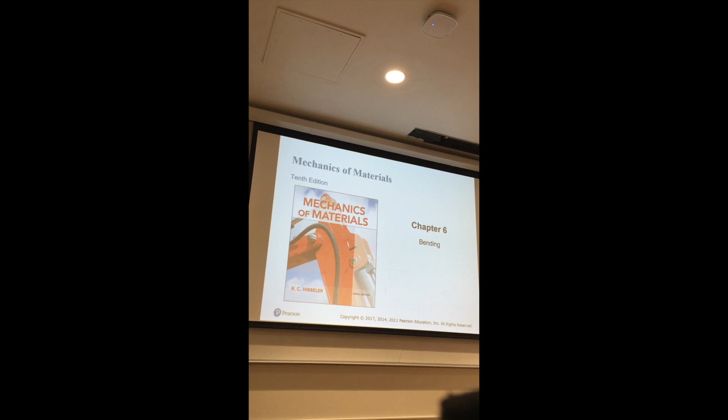So, hopefully you've studied, yes, because if you didn't study, it's gonna be tough, okay? But if you did study, it's not a difficult exam, okay? So you should be able to go through it pretty straightforward, the things we did in class. You have the review questions, right? And the solutions as of yesterday or Saturday, whatever that was. So try those, and if something doesn't work, let me know.

You got the announcement, right? So tomorrow we have an office hour out of the norm because it's the day before the exam. So I'll be on Zoom, you have the link, hop on if you have questions, I'll try to answer them. Again, if you have questions today or tomorrow, let me know, not 9 p.m. on Tuesday, okay? I probably won't be able to see it, okay?

So that's one thing. A couple of you asked questions about how the exam is, obviously in person, you should know that by now. Same place, okay, same time, don't be late. You're not supposed to bring any notes, formula, or cheat sheet or anything, I'll give you all you need. All you need apart from that is a calculator, okay, calculator you should all have. Your iPhones have calculators, engineering calculator that is, okay, you need to do some angles, square roots and so on, okay.

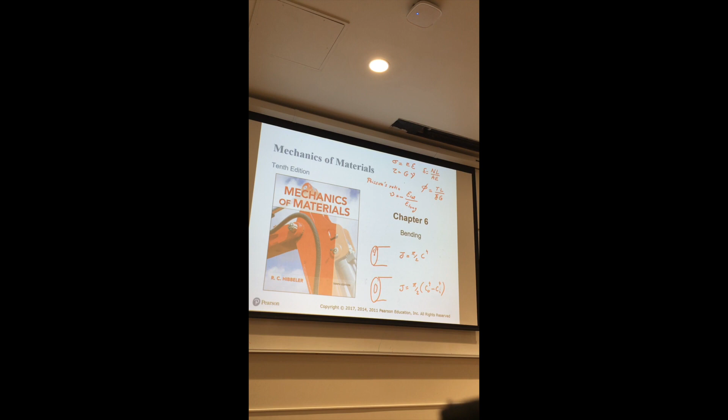What about the compatibility equations? What's the compatibility equation? It's an equation from constraints that we use to apply with the equations we find in the notes. So what is that equation?

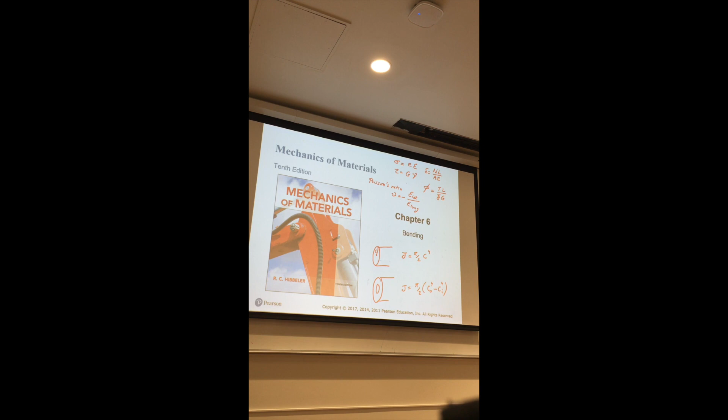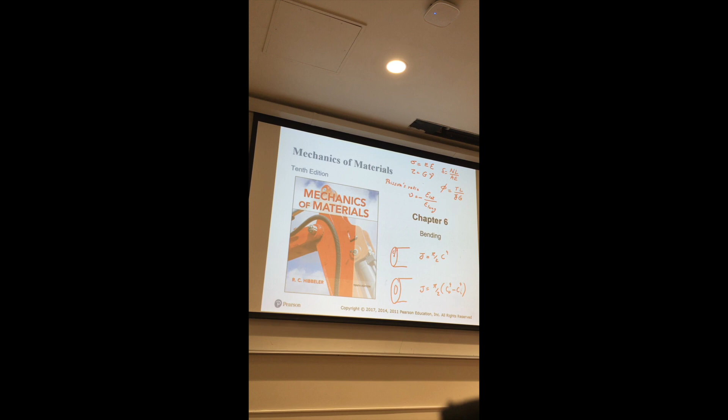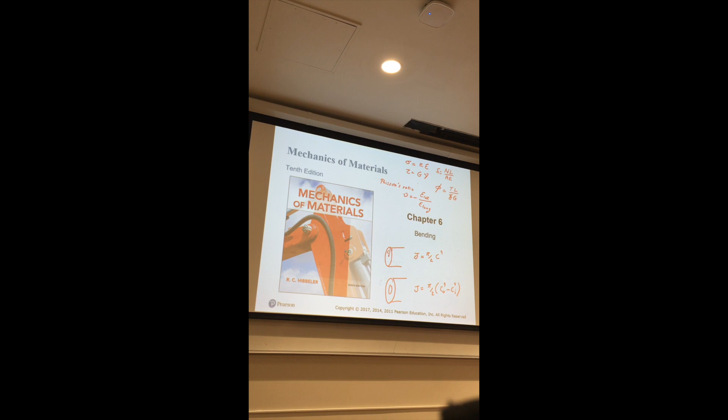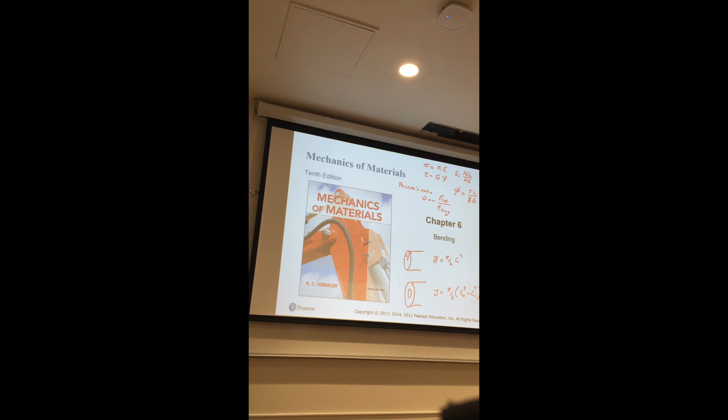So that's the case where you have more unknowns than you can determine, an indeterminate problem. For example, in the case of a column or beam fixed on both ends, what's the equation there? The sum of the deltas equals zero. More simply said, this distance is fixed, so whatever change in length you have is going to be inside. This distance is fixed, right? I don't think that's something I'd need to give you, hopefully you know that.

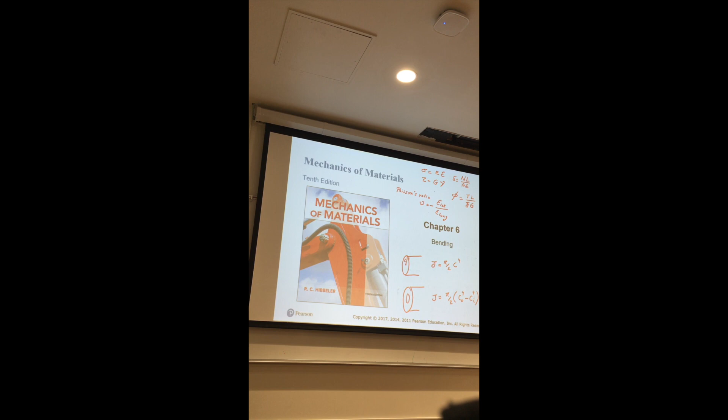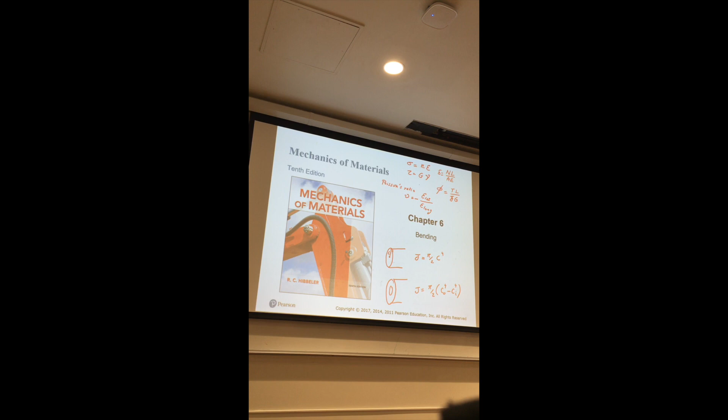Anything else? How about when you have a compressive force and there's two beams that shrink a little bit, and there's a beam in the middle that now hits a little bit of this piece? So like, let's say you have two steel beams and a smaller one in the center, and it pushes a plane, and it squishes the beams that are equal on the left and right, and then the middle one after a little bit. I'm not totally sure I understood which problem that is, but it's the same thing: if the two ends are fixed, you know the length.

If they're not, then you know how much tolerance there is, right? That's another example you should know how to solve. You remember applying a tensile load on a member, and there was a little bit, like 0.2 millimeters of extra room. So you need to fill that and calculate the amount of extra force or resistance. Same deal - you know the geometric constraints, and you apply them.

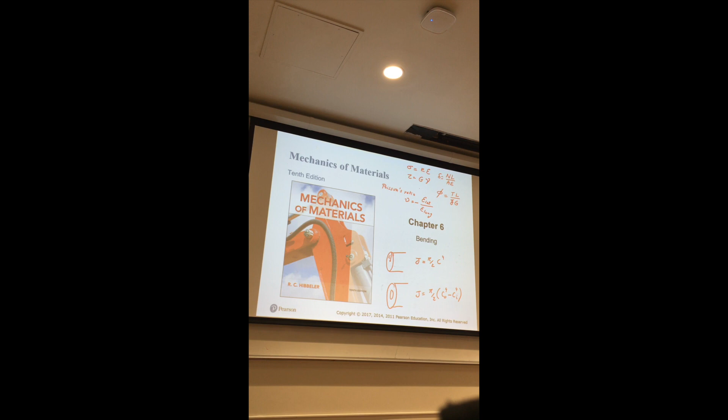Yes? The what? What's a blue book? We don't need it. What is it? I think you have to buy it. It's just like a test book. No, it's like a test packet. Some professors require it. No, I'll give you the physical exam books and you write in those. Sound good? Okay. I don't know, we'll see.

So one more quick thing - you got this, right? Everybody solved this? Good, and you got the final answers I guess. I think this is from the book, but one thing I wanted to mention: we drew up this torque versus X diagram, or in the case of axial load, we drew the force, internal force versus X diagram. Do that for the exam, okay?

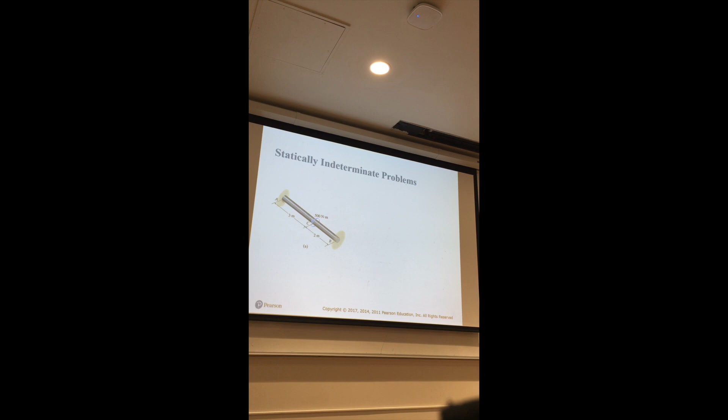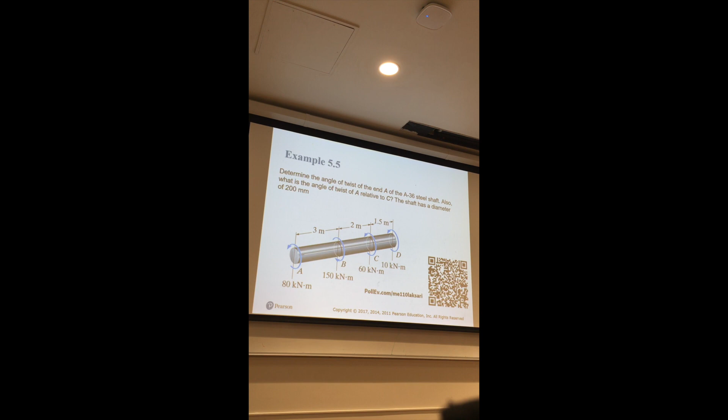So again, you start from the right end of this, X equals 6.5 at point A, and then make your way to the left. You draw that diagram because it helps you - from here you can see that the torque is constant at minus 10 kilonewton meters from x equals 6.5 all the way to x equals 5, right? That's your section, basically. This goes hand in hand with your other section, and should help you a lot. You can do this for the axial load as well. Every time you have a point force or an external load added to the problem, you should expect a jump. So for example, if this is point A, remember that - yeah, it doesn't matter, I think this one went from one end to the other.

So we have 10 kilonewtons at D, right? I think I said A by mistake, but this is D. So at D it has 10 kilonewtons. Here there is an external torque of 10 kilonewtons.

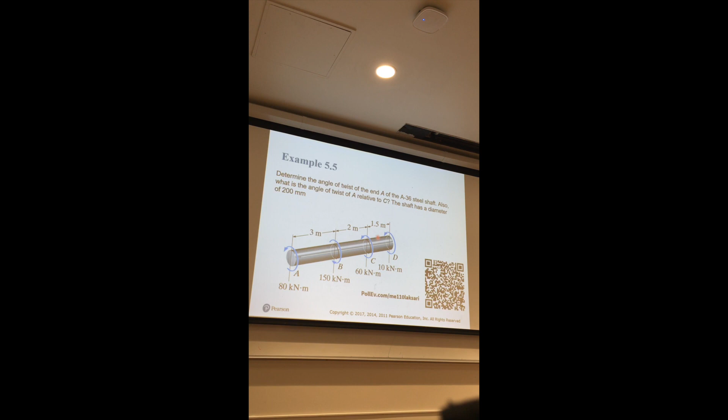Is this negative or positive? There were a few questions about that. This is important, right? It's not important to assume one direction is negative and the other positive, but it is important to stay consistent. The convention we use in class: is that 10 kilonewtons positive or negative? Negative. Why? Because it points towards the... So if your forefingers are the direction of rotation, or the torque, your thumb is the direction of that vector. If it's pointing inwards, that is taken as a negative sign.

So D has a negative 10. It starts with negative 10 up there, and then it's constant all the way to point C, where we have an additional 60 kilonewtons, still negative, because that's also in that direction. So you had a negative 10, you add another negative 60, it becomes negative 70. So negative 10, negative 70, and it goes all the way to point B.

At which point we are applying a positive, this is the other direction, a positive 150 kilonewtons. Why is the 150 positive if the rule still applies? When you curl it, you're still pointing inwards into the rod. That's not inwards, right? But the thumb is going into the rod though. It's going out. How's it going out?

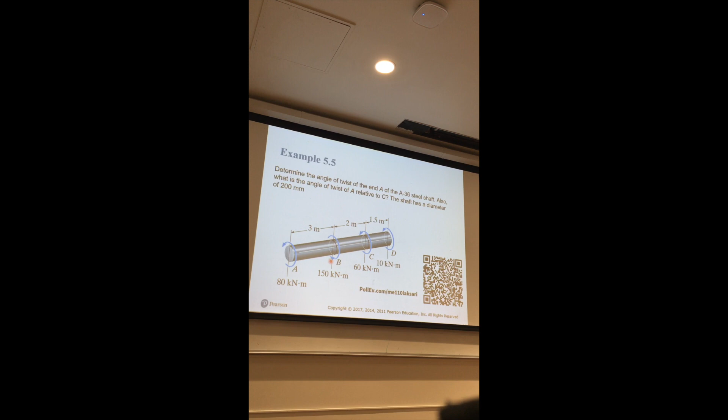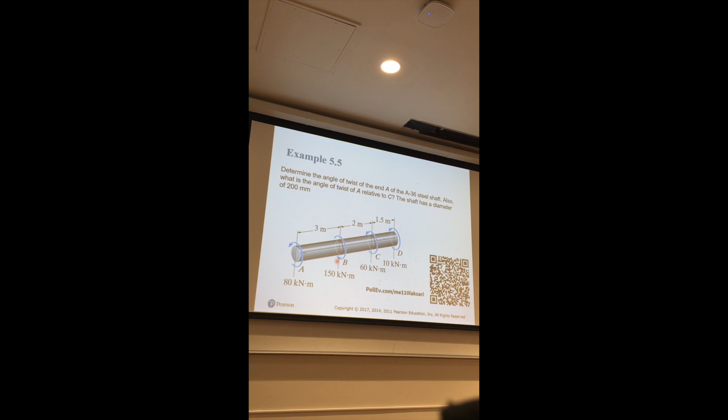But the reason behind it is this: when you make a cut and you're looking at the AB section, that is the direction, so in the AB section it's pointing out. And that's where the jump goes to positive 150, which, we had a negative 70, we go up 150, so that's positive 80. So this diagram will guide you through everything.

So you have this, you know the length, you know the shear modulus, in this problem it's a constant value, so that's easy, but if you need, you can use that. This tells you the lengths, and with each section what area you need to calculate and so on. The rest of it is just plugging everything into that formula. This diagram helps you a lot. The same for axial load, where your y-axis will be N, in newtons, and your x-axis remains the same, in meters.

So what's the torsion? Twisting is that way, right? What's bending? It's that way. You see how they're different? This was my best attempt at 3D visualization here. One more time. So twisting is, you kind of, twisting. You call it twisting even, right? I think that makes sense.

This is the torsion, right? So you see the letters on here are moving with respect to each other, if you think of all those longitudinal lines. But then bending is that way. So it applies the force perpendicular to what we had as torsion.

You had a question? Yes, you symbolized the direction as a dot and an arrow. Well, no, I don't think that's official. Wait, but so I think the way you showed with a dot and a circle that's coming out, and a circle with the dot going in. Yeah, but I just wanted to... I think that marker example was best.

So what's a good example of bending moment? Wait, tell me again, what was the good example for torsion?

Mechanical engineers? What's a good example for torsion? A shaft is a good example, right? Power transmission with a shaft, okay?

And then for bending? A bridge, yes, maybe more civil engineers, but still the same. So bending of a bridge, the loading of a bridge, how is that bending again? Because there's a car coming on it, there's weight on it. The weight of the bridge itself, plus the weight of the cars, that's causing the force kind of in the middle. Or if you think about it, if I have a vertical load on a beam, is that bending again,

or torsion, do you think? So if you look at it, you have a beam, you're applying load here, what's your reaction at the ends, the moments? Those reactions are bending moments, correct? Of course, it's not that simple, and lots of things happen on a bridge, but you can think of it that way.

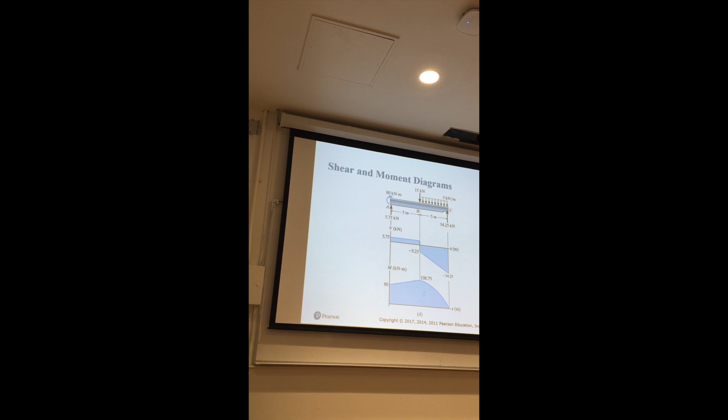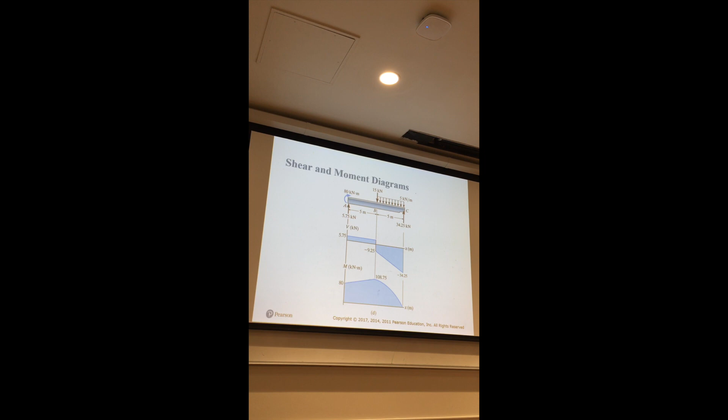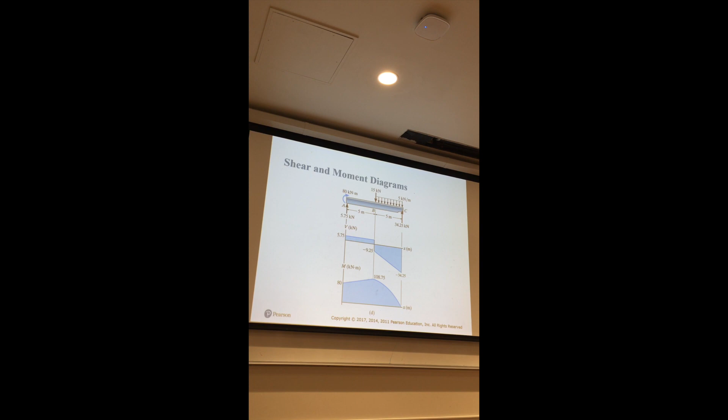What's a good example of that? Like, what is the difference between that 15 kilonewton point force at B and then the distributed load between B and C at 5 kilonewton per meter? I know you all know this, but let's do it quick. What's the difference there? Can you think of a good, real-world example? What is that 15 kilonewtons?

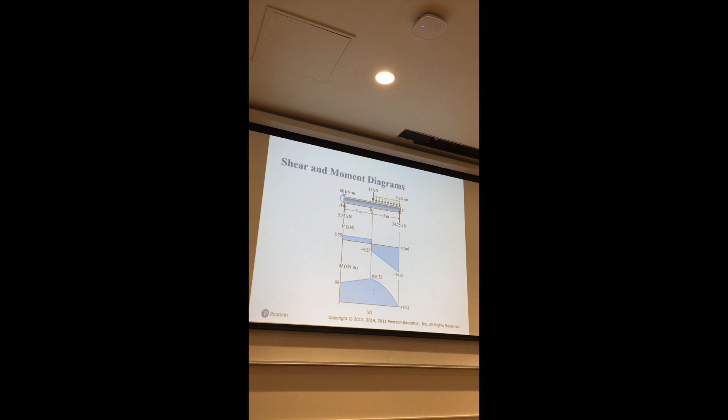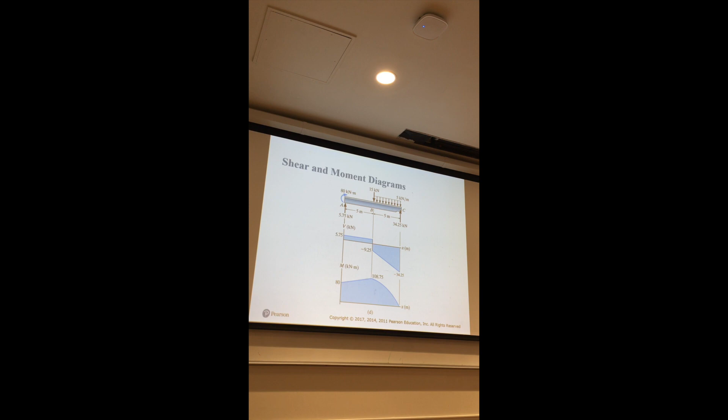Anyone? This should be simple, right? You're just applying some load at that point B. That could be a column right there, or you can have extra weight at that single point. Is it the weight of the beam? Well, is it the weight of the beam? Anyone? It's not the weight of the beam? Why not? The weight of the beam would be distributed across the whole beam, and that's only 15 kilonewtons on one point.

Right. The weight is usually distributed, right, if it is a small scale in terms of the size. If it's small scale with respect to the beam itself, you can assume that as a point, right? So let's say you have a column that's this big in the middle of that beam, but the beam is like 20 meters long. So you neglect that size and you say, okay, there's only one point that's applied. But if you're thinking about the weight of the beam itself, it is distributed, right? Or if you have extra load between B and C, people are standing there, for example. That's a distributed load. But of course, we can kind of go between these, right?

So how do we find the reactions, remember, for free body diagram, for distributed load?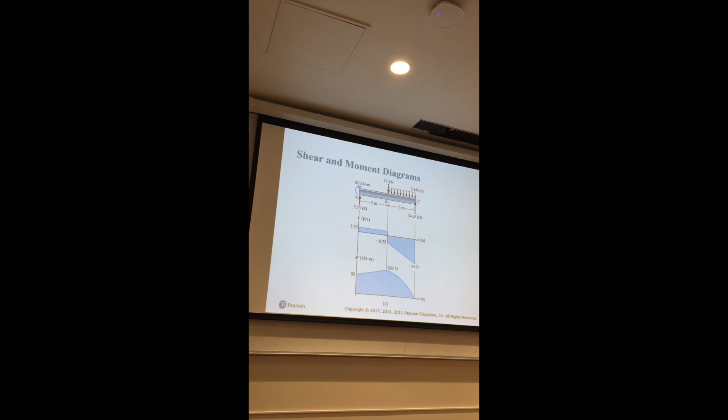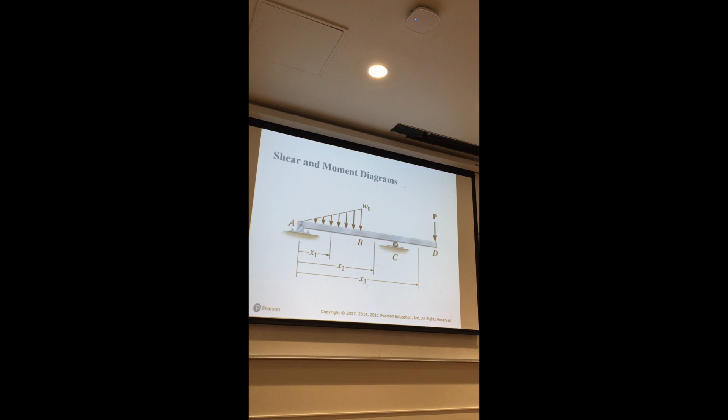I mean, here you have all the information, but let me give you an example. Let's say you have supports at A and C, you're applying load P at the end point D, and then you have some distributed load that is not constant. So this looks like a complicated problem. How do we go about solving something like this?

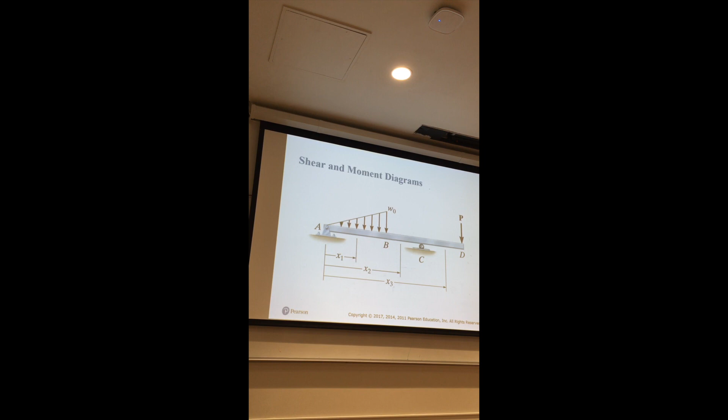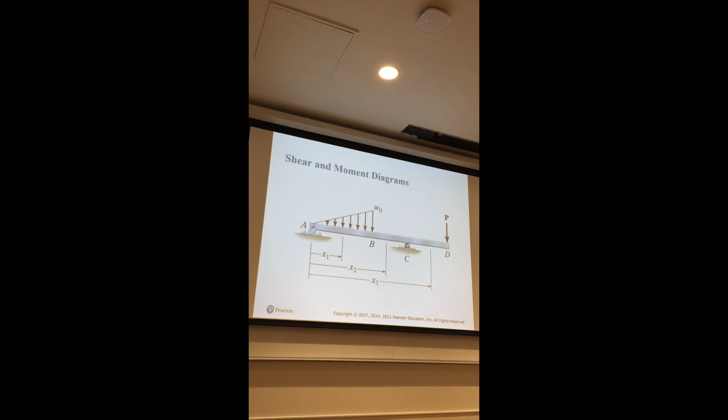First thing, always, free body diagram. So for the free body diagram, you should start by drawing a beam, then draw the applied force P, and the reaction forces at the joints—we have two reactions at A and C, including a normal reaction at C.

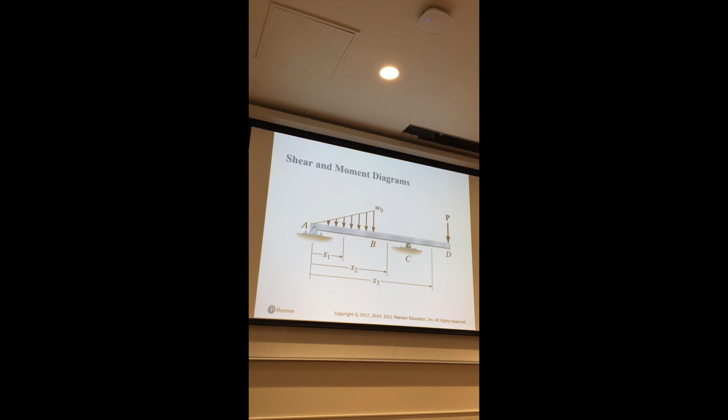Usually we have the reaction forces and moments, right? We have the moments also, and then whatever you want to do in statics, there are three equations: sum of forces in X equals 0, sum of forces in Y equals 0, sum of moments around a certain point equals 0.

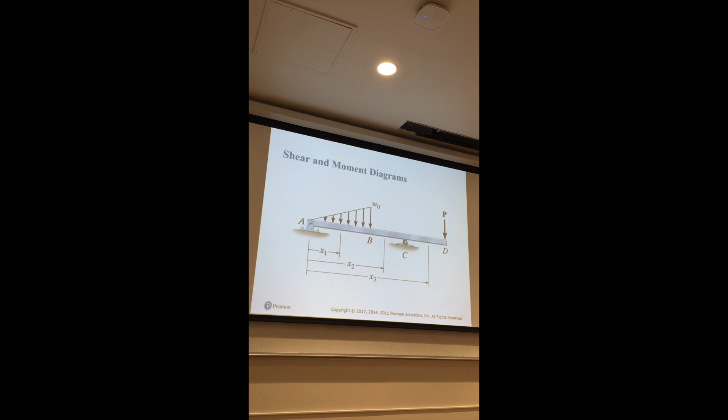So you do that, and then you get all these forces. You have the reaction force at A, let's say in this example, you have the reaction force at C, and you know the moment, 80 kilonewton at A. So this is what you're left with, and then you start from point A.

So what's the first section? Let's say you want to do your shear force, V. Can someone help me draw this diagram or understand it? I've already given you what it should look like. So start from point A.

Let's say we know this arrow at point A, which is 5.75 kilonewton. We start from there, and from A to B that's pretty much all there is in terms of shear forces. So we end up with a constant value there at 5.75. Then what happens at point B?

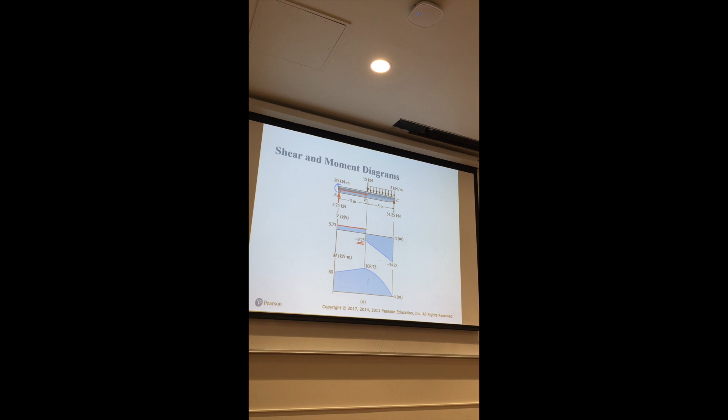An applied concentrated load of 15 kilonewtons is applied at B, so you basically go down by 15. So that should give you what? Negative... 5.75 minus 15, it goes negative. Does this number make sense? Yes, because 5.75 plus 9.25 is 15, so 5.75 minus 15 should be negative 9.25.

But then you have something else there too—you have to consider the distributed load as well. So then you get to 9.25.

We'll do an example—you don't need to solve this all right now, but I want to go through the process of what we do. So let's say we get to negative 9.25, and then what happens here? Why is that at a slope as opposed to the constant value before?

Because the load applied increases with every meter along the bar. Depending on how far you are from point B, that load is increasing—that's the definition of a distributed load. A uniform distribution of load: as you go from point B towards point C, you see more and more of this load, and that's why you have this slope. That's essentially the difference between a distributed load and a point force—a point load you see a jump, and then it stays constant, whatever that is. But with the distributed load, you have a slope.

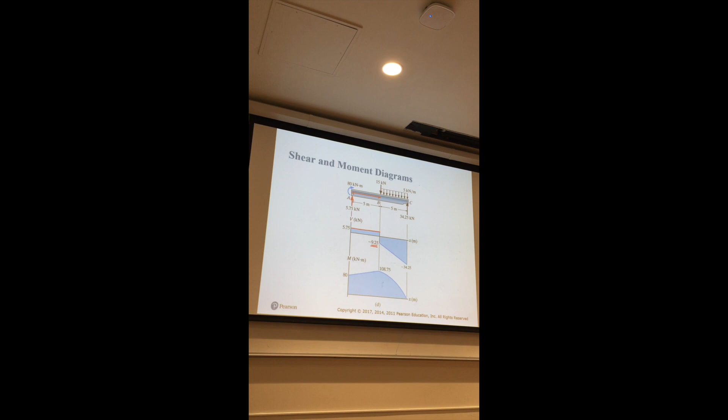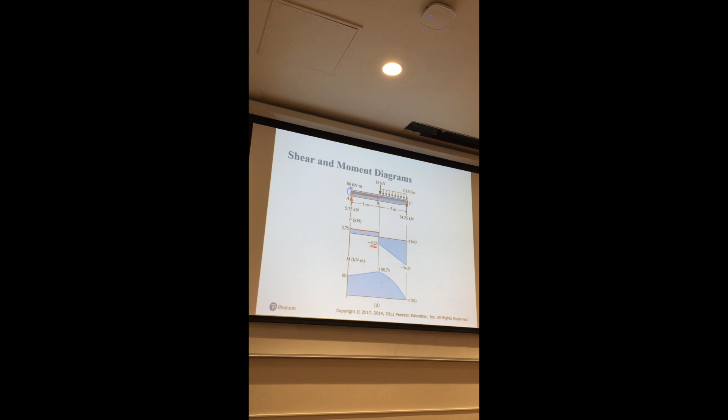34.25 has to be exactly like negative, right? So when you have that external reaction force, it goes down to 0. That's the deal there. So if that number doesn't look like that, you've done something wrong.

Okay, and then we'll derive the... yes? I have a question. So in the center, I'm a little confused with what you did. Why did you add 5.75 to 15 to get negative 9.25? But why isn't it like, because on the ends the points are just equal to the forces at the end in the graph. So why in the center is it not like that?

In the end, say that one more time. In the end, they're the same as... so in the graph, the points, the y-axis, V kilonewtons, is equal to the force at each end of the beam, whereas in the center it's like you added. That's a good question. Like, why does it do that? So who can tell me, who can help me answer this question?

So the question is, well, we start with 5.75, which is the same as reaction at A, and then we end at 34.25, which is the same as reaction at point C. So that's the forces, and you see the same exact thing on that diagram of V. What happens in the middle?

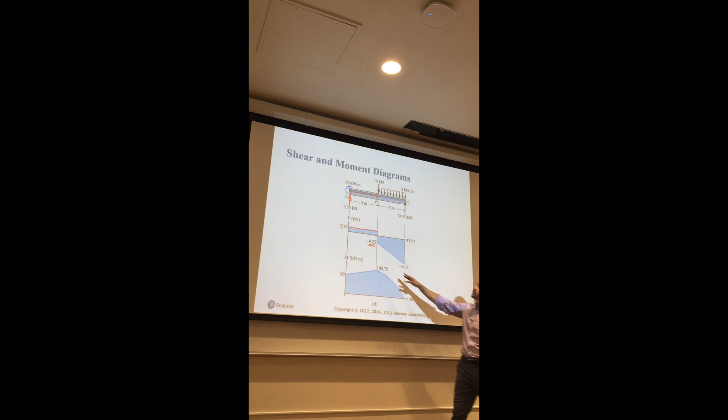So why don't we have 15, right, or something. Is that the question? Yeah, pretty much. So why? Who can help me? Like if you imagine you put your finger across the beam, you start with a positive 5.75 and move along it. It's always going to be 5.75 until you get to the point of 15, in which it's now 15 minus 5.75 instead of opposite direction, which is how you get negative 9.25.

And then you follow the forces again, but you see that the 15 kilonewtons goes down to 5 kilonewtons per meter, so that's at the end eventually going to get to negative 34.25. So because it's this diagram. Does that make sense? Well, okay, so does this look like the method of sections that we've been doing?

That was a trick question. The answer is yes, it is the method of sections. If you think about it, you start from that end, and then whenever you have an additional external force, there's going to be a change in your V diagram.

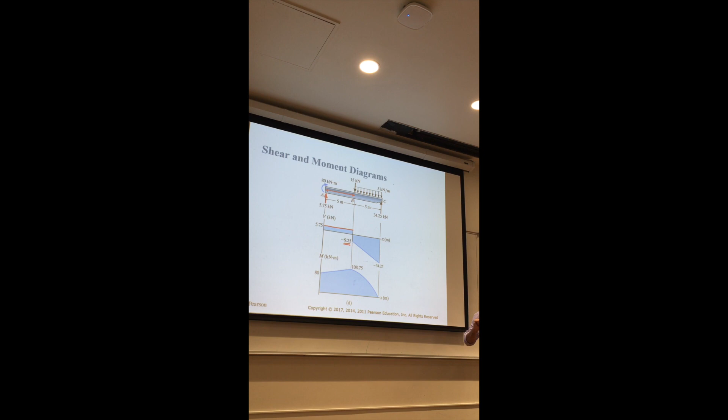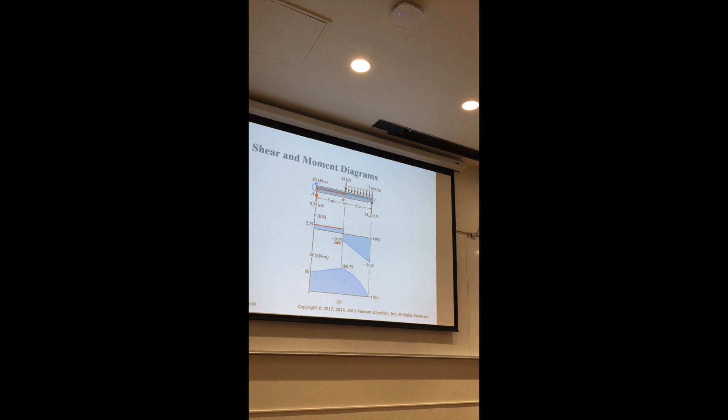Essentially, this is your internal shear force diagram, right? And that's what you do, you start from that end. The reason why that number is not equal to 15 is you already have some internal force in the beam, and then you apply that 15 on top of it, right? So that total negative 34.25 is essentially because the force in C now has to totally cancel that out.

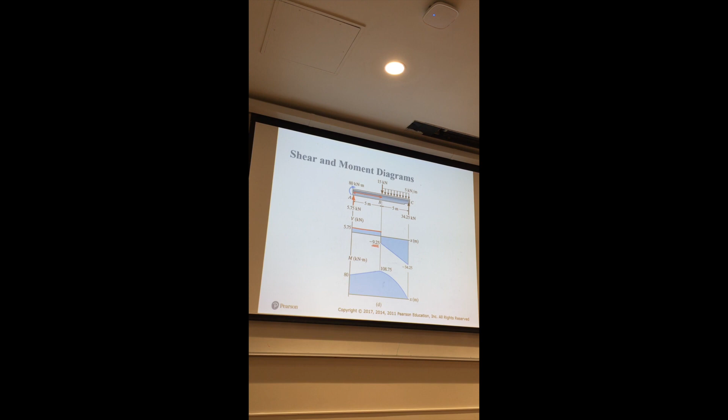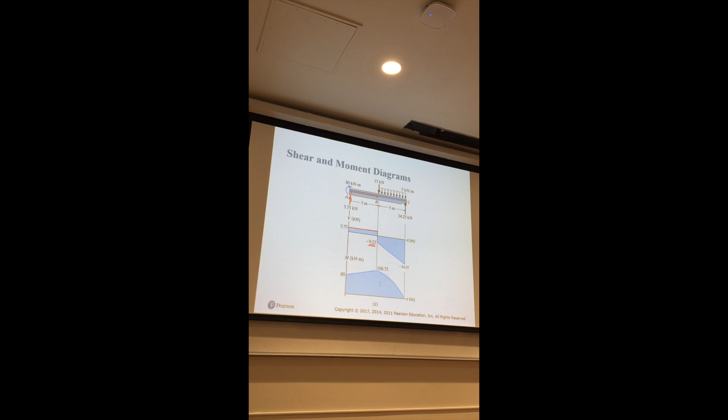So you have to consider equilibrium always, right? At every point, you need to have equilibrium. So that's why when you make a cut, you have 5.75 internal shear force, and then you make a cut there, that has to be equal and opposite in direction. That's the reason, basically. Good one. So hopefully, we're repeating this over and over. You're all familiar with the concept of equilibrium, but you need to kind of see that everywhere, right? In these static problems, you need to have that always applied.

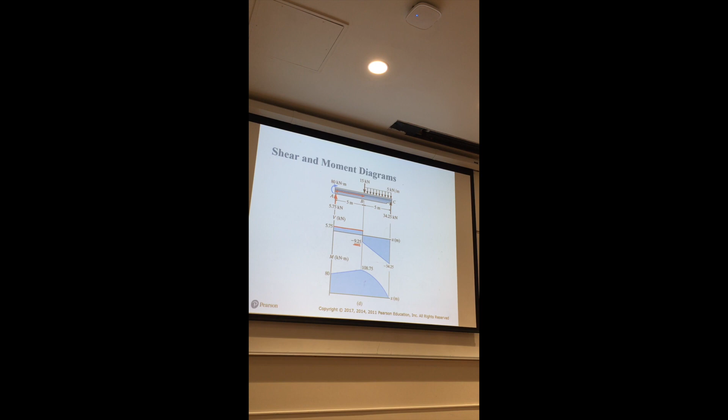Okay, again, a couple of notes here. Does it matter if I start from left or right? It doesn't matter, it's arbitrary, right? So you can start from point C and say, okay, at point C I need to start from 34.25, and then go to the left. Usually the convention is you start from the left and move this way, okay? So your axis, basically your x-axis, is arbitrary, but you know that already.

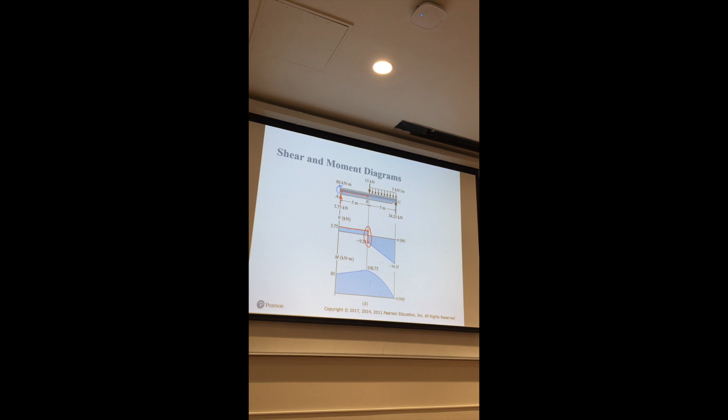And then the other thing is you see these, what we call discontinuities, right? So the number is 5.75, and then all of a sudden it jumps to negative 9.25. You've seen this before, right? In the case of moments, or torsion moments, or axial loads, right? You're already familiar with this, but this happens when?

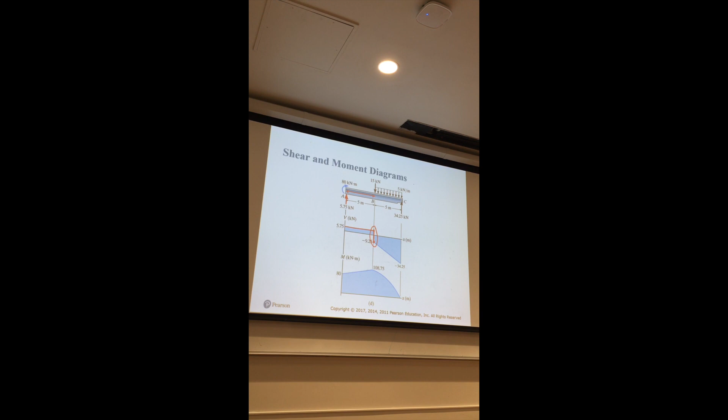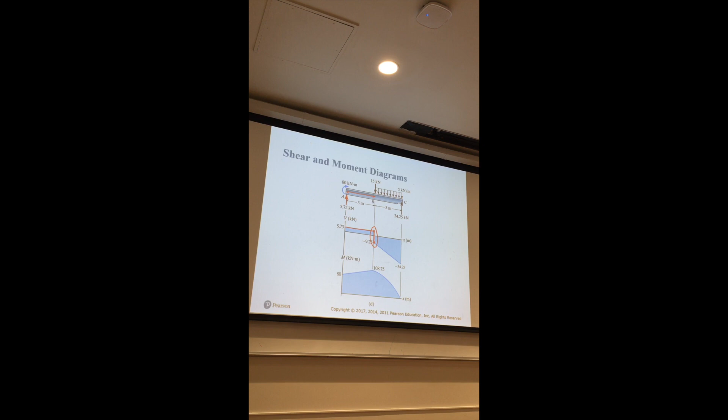Every time that we have an external force or external moment or something like that, you will see a jump there in the shear force, especially. Okay, so let me make that more clear. So whenever you have an external shear force, you see a jump in the shear force diagram. Whenever you have an external moment, you will see a jump in the moment diagram, right?

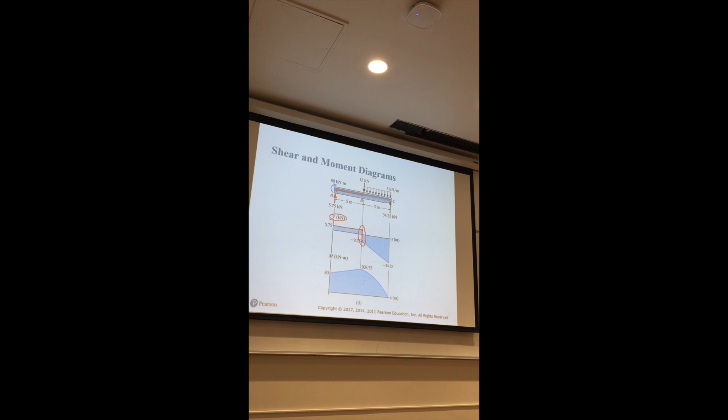So this is a continuous graph. There's no discontinuities here, because why? Because we don't have any moments applied externally in the middle of the beam. But if say we had something here, you would see a jump at this point to some value, the same way you see now in the shear force diagram. Okay.

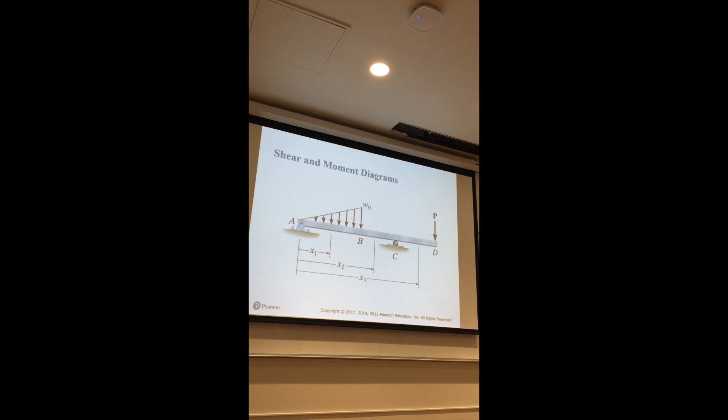So the reason why I say this is similar to method of sections is that these shear force V and moment, internal moment M, you deal with them wherever they're between these two discontinuities, right?

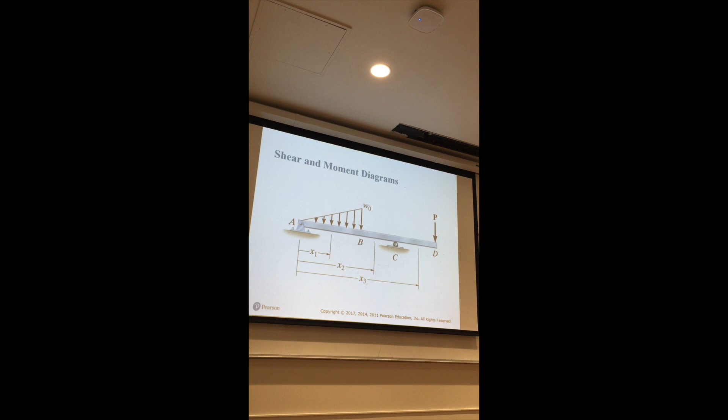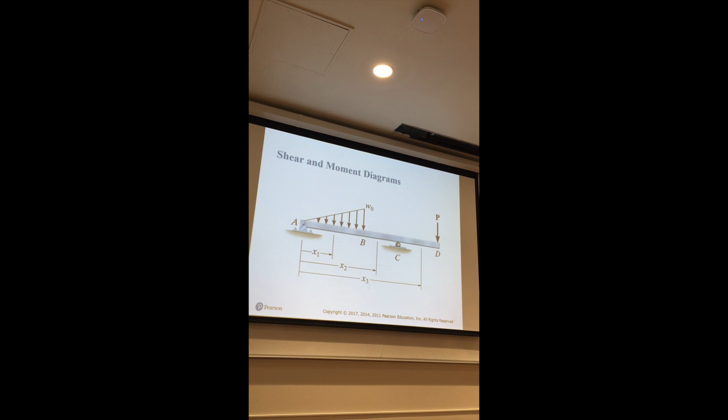So in this example, we start from A and go all the way to B. So we have AB as one section, and then BC as another section. There's no force there, so it stays constant, so you take that as one. Then you have the external force C applied here, so this is another section you need to look at. Definitely you will have a jump in shear force at point C.

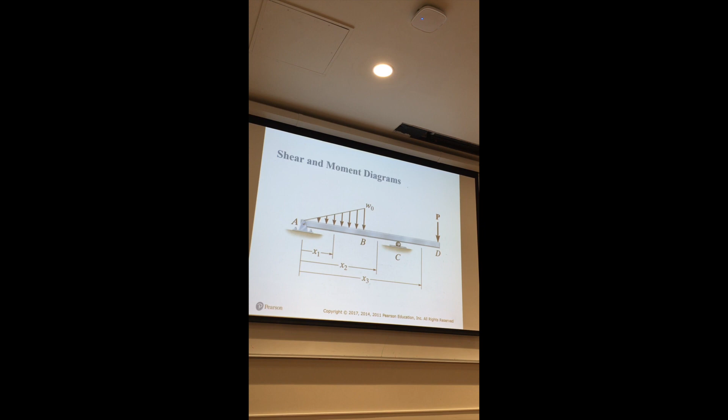And then you go all the way to D. So like before, you look at AB, BC, and then CD, and calculate the shear forces inside for each of those regions, okay?

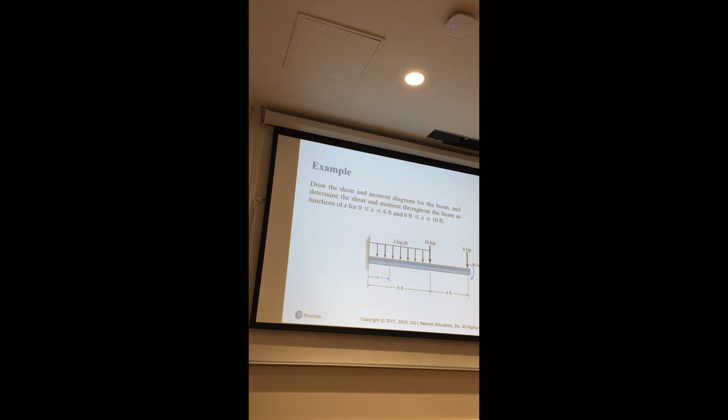So, let's do a simple one. Draw the shear and moment diagrams for the beam and determine the shear and moment throughout the beam as functions of x, between 0 and 6 and between 6 and 10.

So what do you think we have here? Where do we start again? Free body diagram, right? So what's the free body diagram here? Can you help me? So you have a reaction portion—you have two support reactions at where the beam is connected to the surface.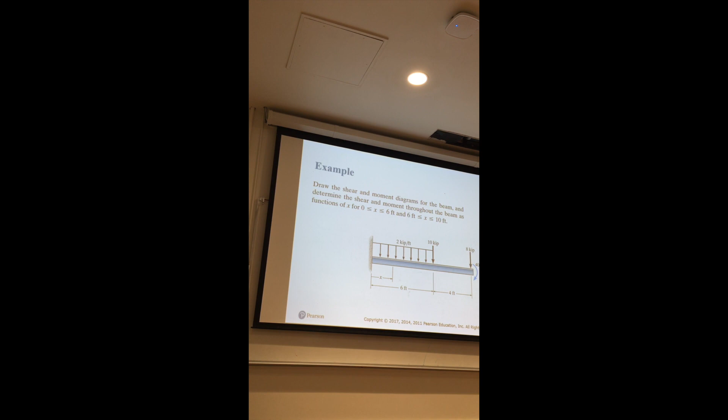30, everybody agree? So how did you calculate that? You have an 8 here and a 10, so 18 negative. And 2 kips per foot over 6 feet is 12 kips—6 feet times 2, that's 12. 12 plus 18, that's 30, negative 30, right? So what you need there is a positive 30. Good, that's good, right? Everybody agree with that?

So we have a 30 kip reaction force in the positive direction. So that's good. And then what else do we have? I would say there's a moment there, right? So what's the moment? Okay, so we have a 40 that's trying to rotate this.

What else do we have there? That 8 kip is trying to also apply rotation there. So what's the corresponding moment to that? 8 times... 24? Oh wait, no, sorry—why 24? Sorry, I almost wanted to say something. I meant to add: 8 times 10, that's 80, plus 40 or minus 40? Are they the same direction? Same direction, they're both, right? So 80 plus 40, we have 120 so far.

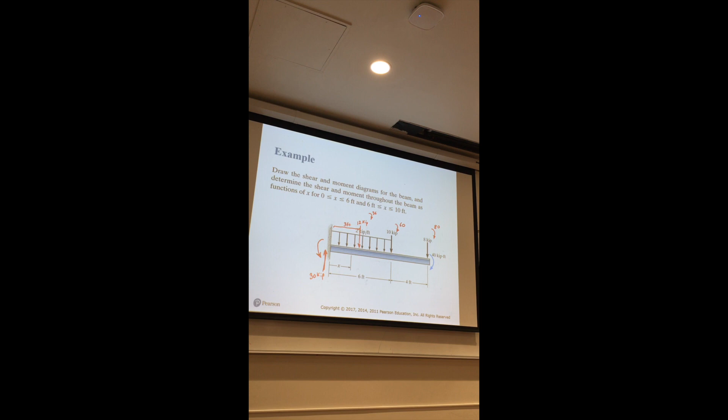Everybody follow me? Good. Okay, so what is the reaction moment at point, whatever that's called, A, at the far left? 216 kip by feet.

So 80 plus 40 plus 60 plus 36, right? What did you say that was? 216. 216 kip feet, foot.

Okay? So far so good? So then...

Is this the right one? That doesn't look right. Okay, I think I copied the wrong thing here. Anyway,

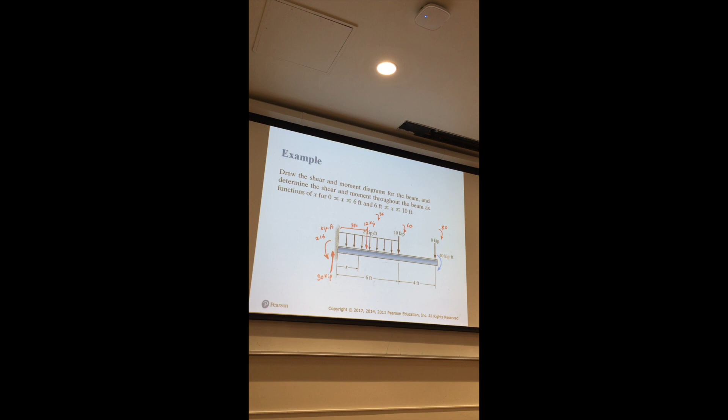So let's say this is V as a function of x. So where do we start? 30. So we have 30. Is that positive or negative? Positive. Okay.

And then what happens next? It decreases linearly. Decreases linearly from 30 to 18 kip. You have a distributed load of 2 kips per foot. Right. So, but you said that it's negative, right?

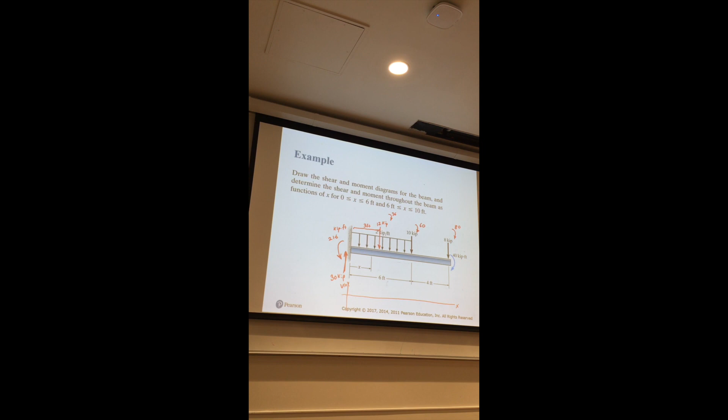Yes. So we start at 30. So what is 30? 2, so 12. It's gonna go down to what? 18. I apologize for this small

kind of font here, but so this is 30. It goes down to 18 because of the... Ooh, that's not right. So like this, right? So it goes all the way to this point, at which what happens?

It takes a drop of 10 kip. So now we are... so it goes down to 8.

I think the book has done a better job in drawing this for you, so take a look at that. But hopefully it makes sense, right?

So we start with 30, which we found to be the reaction force here. That's positive. We start there and then linearly deduct from that 30 at a rate of 2 kip per foot, right? So after 6 feet, it's going to be 30 minus 12, so we end up at 18 right here,

okay? And then what happens here is that we have a negative 10 applied externally, so there will be, you should expect a what? A discontinuity there. So it drops down by that same amount, 10, okay?

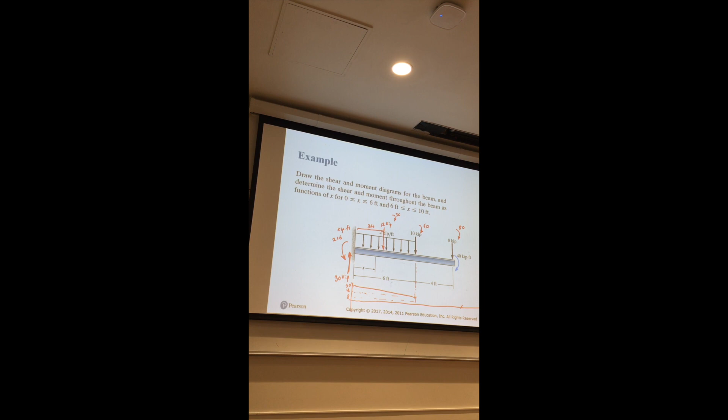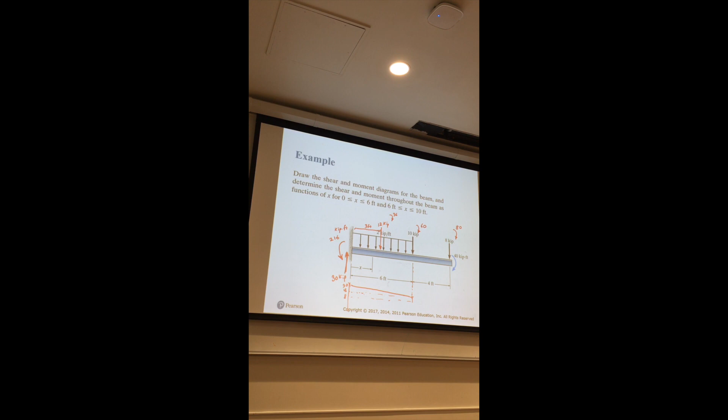What did I do? So this should be your shear force.

Okay. And then for a moment, what happens? We'll see that the moment is, you know, kind of, this acts as the slope of that moment graph.

I'll derive the equation next time and show you how that goes. And then usually what you see in the moment diagrams, you see kind of curved lines, right? Because if you take an integral of this, you know, you see a quadratic function, integral of that would be, you know, as if this is the slope of the moment diagram.

So there the slope is a linear function, you take the integral, you get a quadratic function. Here the slope is constant. So then you'll end up with a linear line moment.

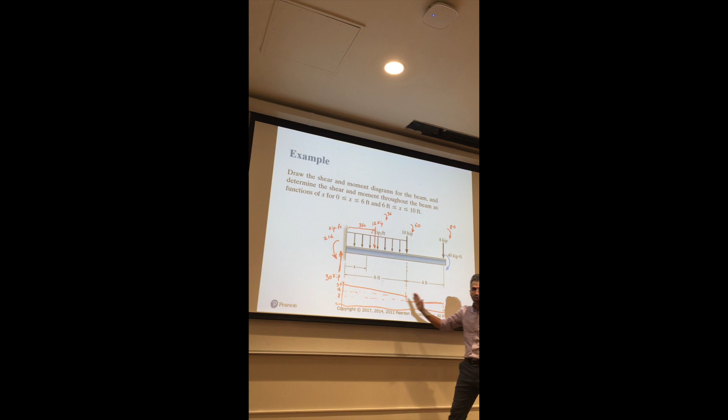So at least for the shear force, you know, again, I want you to practice this method of sections a lot, because you see that you start from one end and then you go one by one. If you have the right free-body diagram, the rest of it should be simple, right? You just go from one point to the other and then draw the corresponding.